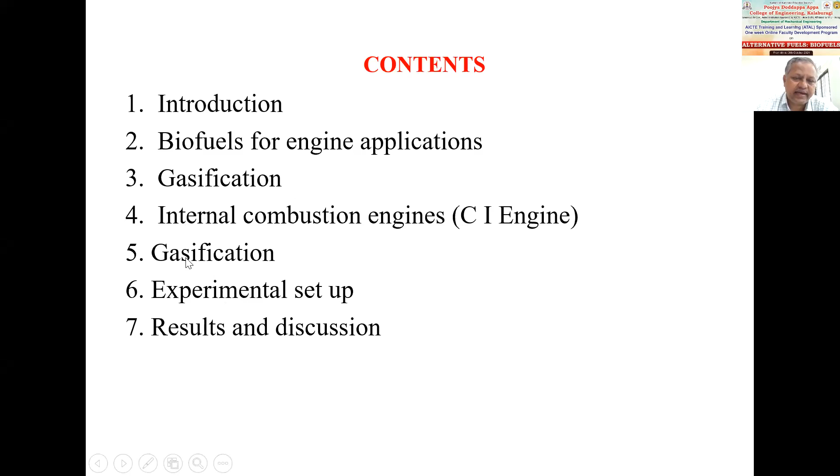In the third section, gasification means the production of gaseous fuel, that is an alternative gaseous fuel, that is producer gas. That will be discussed. In the sixth section, the experimental setup and results and discussion will be discussed, a different topic will be covered there, right?

First, an introduction to this topic. Everyone already knows why alternative fuels are used. The first reason is the depleting nature of fossil fuels, the second is the increasing cost of fossil fuels, and the third is increased pollution and stringent emission norms. These are the main reasons for using biofuels for engine applications.

The depleting nature of fossil fuels must be understood with some data, which I will explain in the coming slides. These are the main reasons.

All alternative fuels are renewable in nature and biodegradable, and they provide energy security and foreign exchange savings. These alternative fuels also address environmental and socio-economic issues. With the growth of the economy, India is expected to become the world's fourth largest consumer of energy by the year 2020, though this is still not yet achieved.

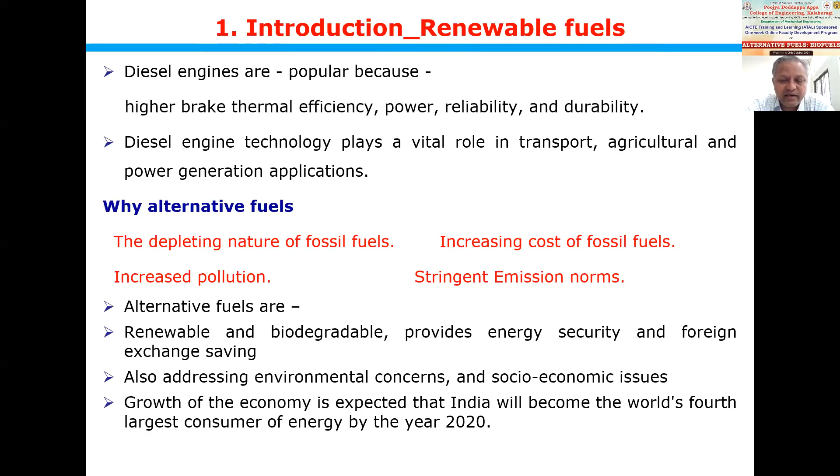The first reason I mentioned is that fossil fuels are not renewable, meaning all fossil fuels may deplete within some years. How do we prove this? Here is some data.

World proved reserves of crude oil at the end of 2012 were about 235.8 thousand million tons. In India, it was 0.8 thousand million tons. This data is as of the end of 2012.

In terms of barrels, world proved reserves were 1,668.9 thousand million barrels. In India, the crude oil reserve was 5.7 thousand million barrels. These are the proved reserves in the world and in India.

World proved reserves of natural gas at the end of 2012 were 187.3 thousand cubic meters. In India, it was 1,354.76 billion cubic meters. From this data, we can understand that fossil fuel is depleting.

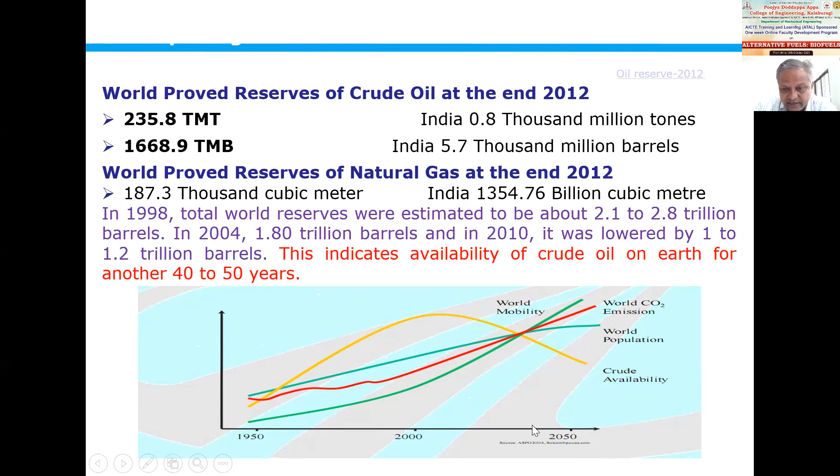From the graph shown here, along the x-axis toward 2050, the crude oil availability line, shown in yellow, is decreasing. At some point around 2040, crude oil will become empty in the earth's crust. From this graph we can understand this, along with the data proving the depleting nature of fossil fuels as one reason for depending on alternative fuel.

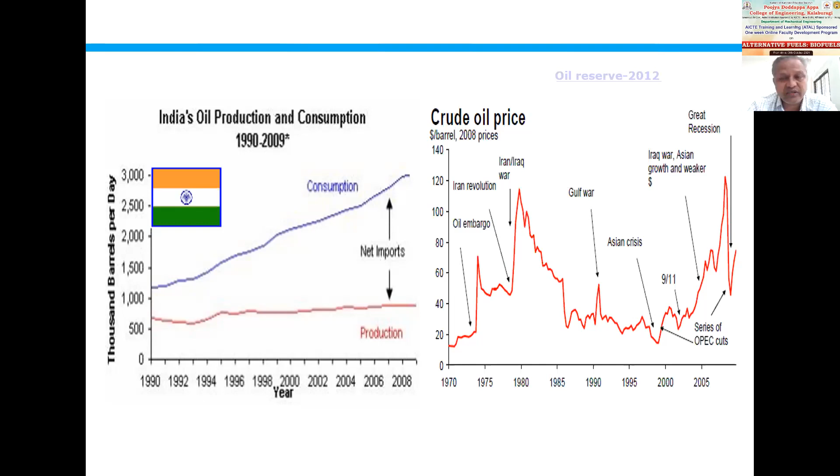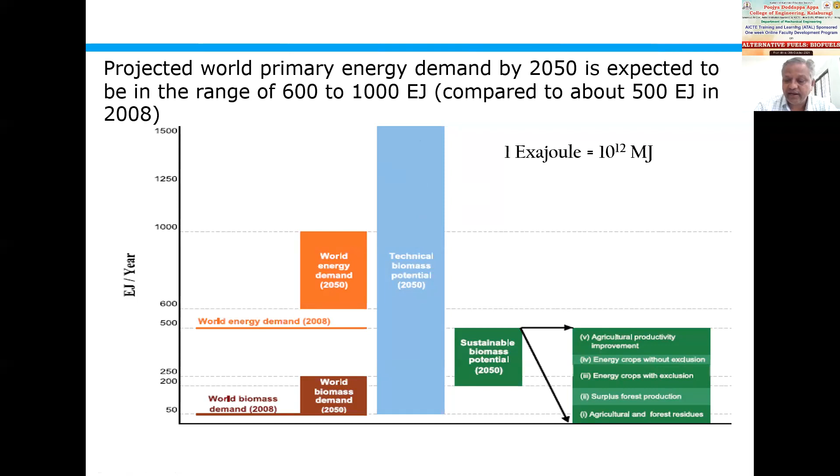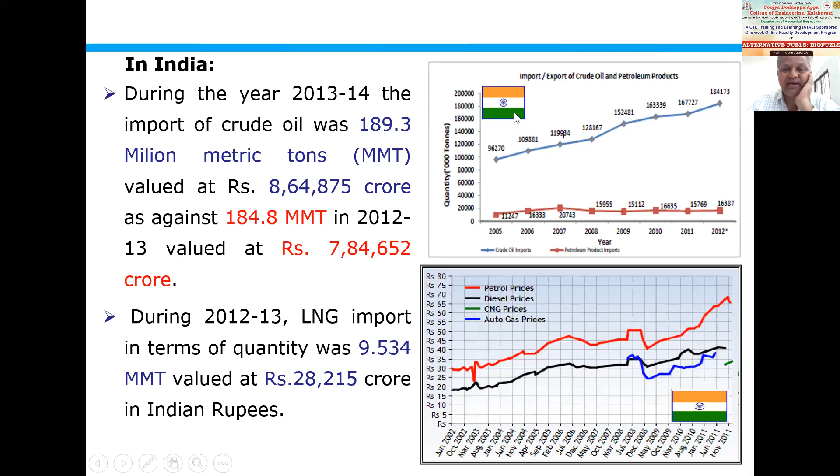Similarly, the LNG gas and natural gas imported is 9.534 million metric tons, valued at 28,215 crore in Indian rupees. This is the same trend explained in these graphs.

Next is the third reason for using alternative fuels. Why are we going to use alternative fuels? The third reason is emissions.

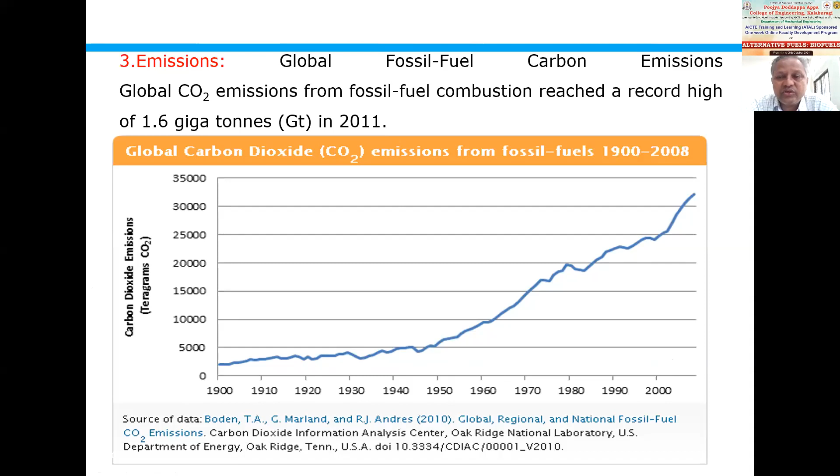If you start to use fossil fuels in an engine, they emit harmful emissions. From this graph, you can see global fossil fuel carbon emissions, global CO2 emissions from fossil fuel combustion reached a record high in 2011. In 2000, around 25,000 teragrams of CO2 was emitted. Every year the CO2 gas was increasing, meaning emissions are going to increase. So if you start to use alternative fuel, this emission can be reduced to some extent. That is the main reason.

In India during 2010, CO2 emission was around 310 million tons, which is 6.41% of world emission. India contributed 6.41% towards this CO2 emission. Biomass burning amounts to more than 1 billion tons of CO2 emitted into the atmosphere. Just considering India alone, every year the CO2 was increasing.

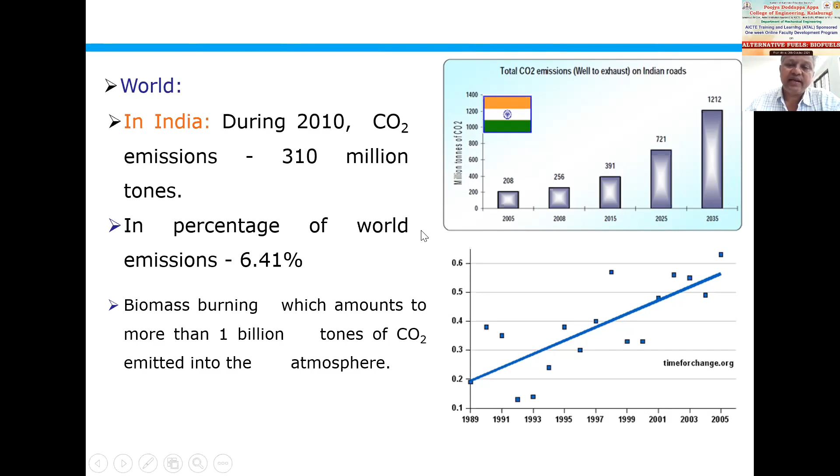From the graph, in 2015, 391 million tons of CO2 was emitted in India, and it may keep increasing. In 2035, how much CO2 may India produce? That is 1,212 million tons of CO2 India may produce in the year 2035. This shows that every year the emissions are increasing because of using fossil fuels.

This is also vehicular emission load in metropolitan cities of India. This record is taken from 2005. The pollutants considered are particulate, SO2, NOx, HC, and CO, along with the grand total for the year 2005. In India, the vehicular emission load: particulate about 35.31 tons per day was emitted, SO2 29.84 tons per day, NOx 422.88 tons per day, and HC unburnt hydrocarbon emitted during 2005.

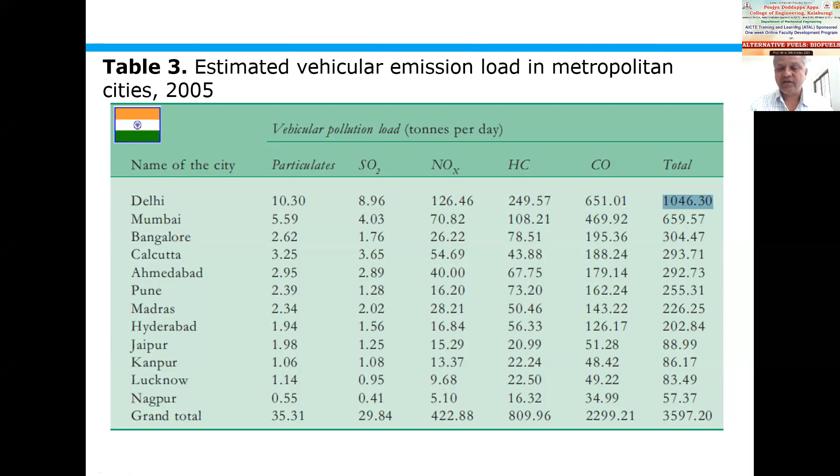809.96 tons per day, and CO carbon monoxide emitted is 2299.21 tons per day. Total emission during the year 2005 in India is around 3,597.2 tons per day. This much emission was produced by India.

This is why we are going to use alternative fuel. These are the main reasons: first, depleting nature of fossil fuels; next, price of fossil fuels is increasing; next, because of emissions. We must go for biofuels or alternative fuels.

The second topic is biofuels for diesel engine applications. This is about green energy and renewable energy. What are these? What is the difference between these two? Is green energy the same as renewable energy? Somewhat both are different. Renewable is not the same as green energy. Renewable energy source simply does not deplete.

Renewable energy means any source which is not depleting in nature, that is called renewable. Examples: solar, wind, hydroelectric—these are all renewable. Green energy is that which comes from natural sources such as the sun. Clean energy types do not release pollutants into the air, do not harm the ecosystem, and do not contribute to acid rain or worsening global warming. For example, sun energy can be used for producing electricity—this is green energy.

Renewable energy alternate fuels like ethanol and biodiesel, if used in a diesel engine, are renewable. Ethanol is renewable and biodiesel is also renewable. But when used in an engine, they produce emissions again. So this is renewable, but does not come under green energy. Green energy means it is clean energy that does not release pollutants—such energy is called green energy.

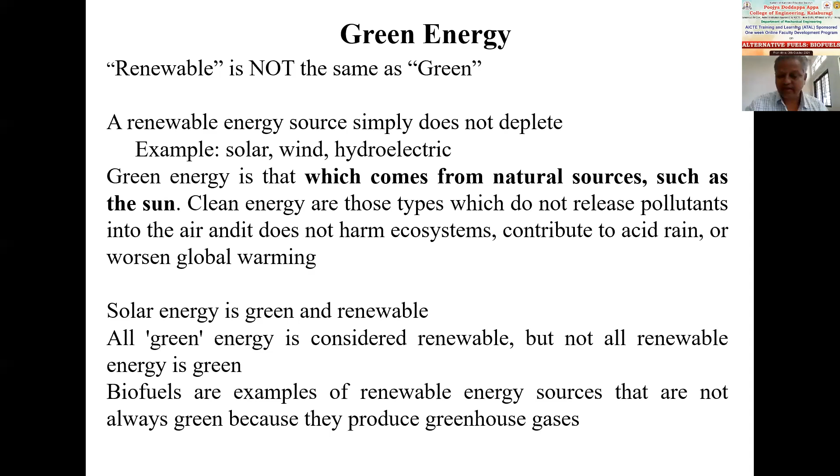Is there any difference between renewable energy and green energy? Are all renewable energies green energy? No, all renewable energies are not green energies. Renewable energy means they emit at least some small quantity of emissions, so they are not called green energy. Green energy means they are not emitting any type of emissions.

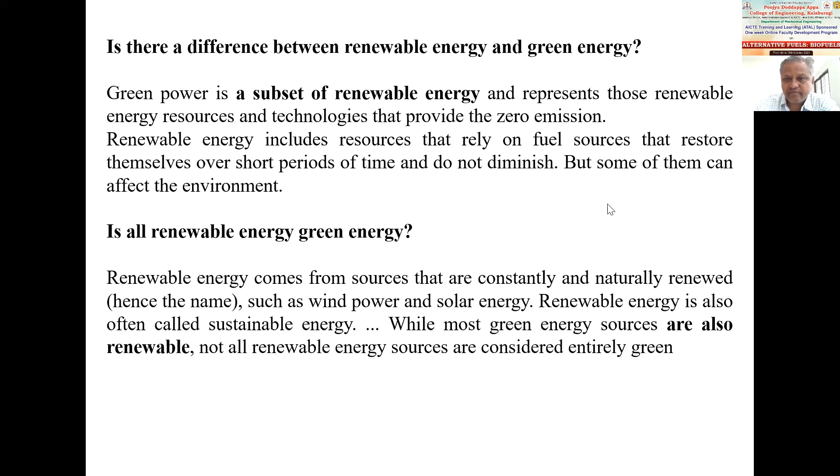Next, what are the main benefits of alternative fuels? The main benefits of alternative, renewable fuels or biofuels are that they are safe, available abundantly, and clean to use when compared to fossil fuels.

Use of biofuels or renewable fuels in engines reduces greenhouse gas emissions, improves public health, and can increase jobs or employability along with other economic benefits, as well as stable energy prices. They are renewable, reliable, flexible, and stable, biodegradable, and address energy and socio-economic issues, and save money.

There are many different benefits like that. There are many number of benefits. We will just go through that.

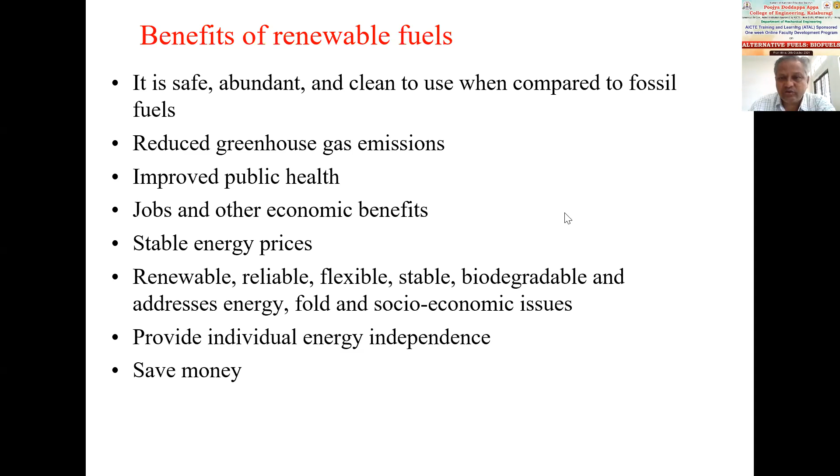Next is disadvantages. If all vehicles start to use these alternative fuels, is it possible to supply for all the vehicles from the government? No, it is not possible. That is the main disadvantage of renewable fuels.

Second, it is difficult to generate quantities of electricity as large as those produced by traditional fossil fuel generators, and commercially they are not viable. They also require storage capabilities, pollution is still generated with renewable energy, subsidies are not satisfactory, and projects require massive amounts of space, meaning land is required for growing these plants.

For example, Honge and Jatropha are non-edible seeds we get from these plants. If you want to grow such plants, large land is required, which will reduce food production, meaning it may increase food scarcity. That is the main reason for this disadvantage.

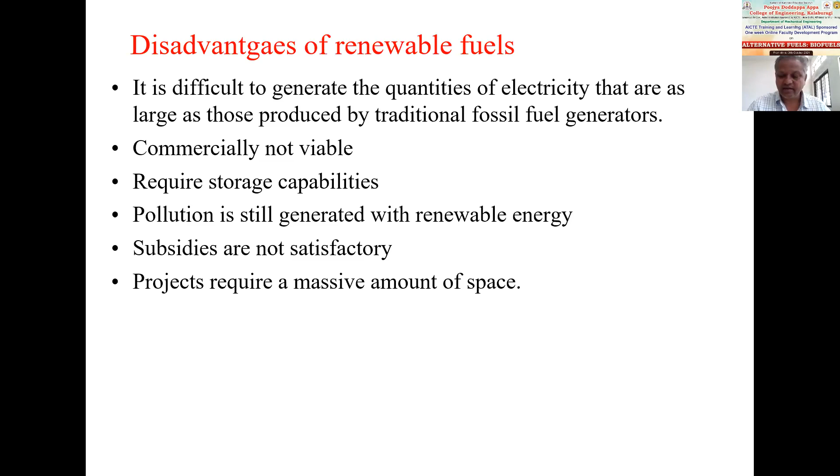Next is classification. How do we classify biofuels? The first classification is by generation: generation 1, generation 2, generation 3, and generation 4. There are 4 generations in this classification.

In the first generation, biofuels are derived from food crops. Such crops come under generation 1, like wheat, sugarcane, soybean, etc.

The second generation fuels are produced from non-food crops, meaning lignocellulosic biomass such as wood, agricultural residues, forestry waste, and organic waste. Fuels generated from these come under generation 2.

Generation 3 fuels are derived from algae and other microbes. Such fuels come under generation 3.

Generation 4 means an extension of generation 3 biofuels. In generation 4, algae is modified via genetic engineering to alter its properties and cellular metabolism. This is generation 4, just an extension of generation 3. This is the classification.

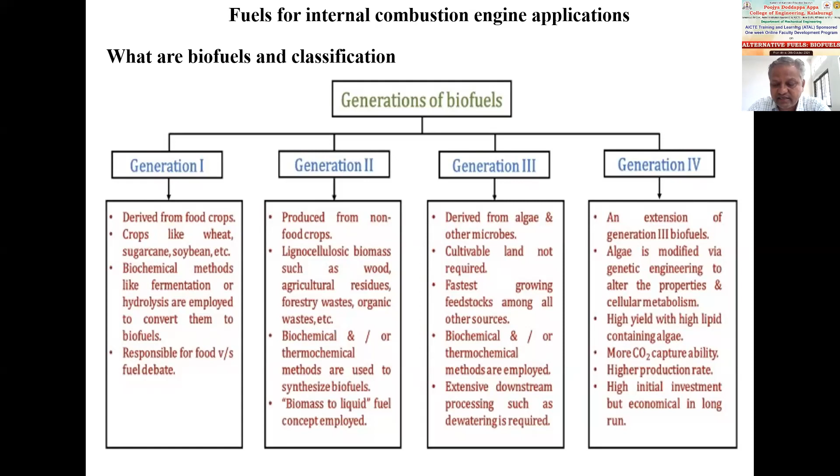As I already told you, in SI engines all types of alcohols and gaseous fuels can be used. In CI engines, biodiesels of different origin and gaseous fuels in dual fuel mode can also be used. Comparing energy content, the energy content of biodiesel is 90% that of its counterpart petroleum diesel.

The main disadvantage of alternative fuels versus fossil fuels is that alternative fuels have a very low energy content.

Based on calorific value, for example, a vegetable oil biodiesel used in a diesel engine has a calorific value of about 35 to 36,000, maximum up to 40,000 kilojoules per kg. Diesel fuel has 44,000 kilojoules per kg, so the calorific value is less. Therefore, the energy content of all vegetable oils and biodiesels is lower than that of diesel fuel.

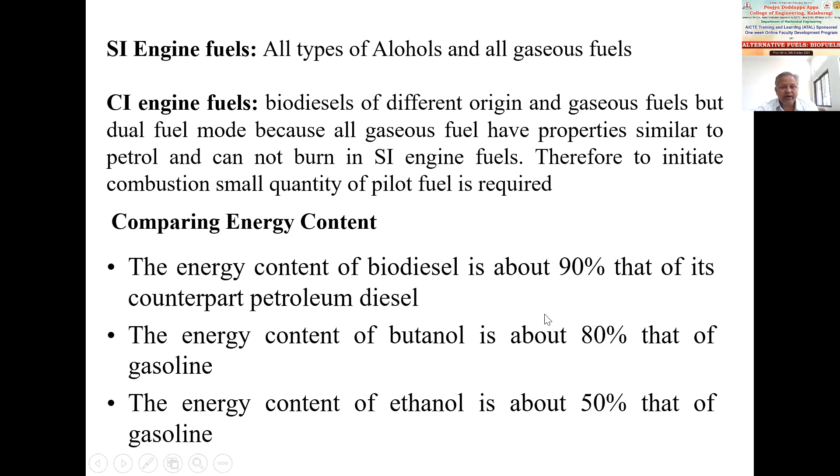Right, next one is in the next slide. These are the properties of different alternative fuels. Here, corn, palmitic acid, and different fatty acids are present in alternative fuels. In cottonseed oil, how much fatty acid is there? Here palm oil, peanut oil, rapeseed, safflower oil, soybean, like that. These are the different biodiesels, and they have different types of fatty acids.

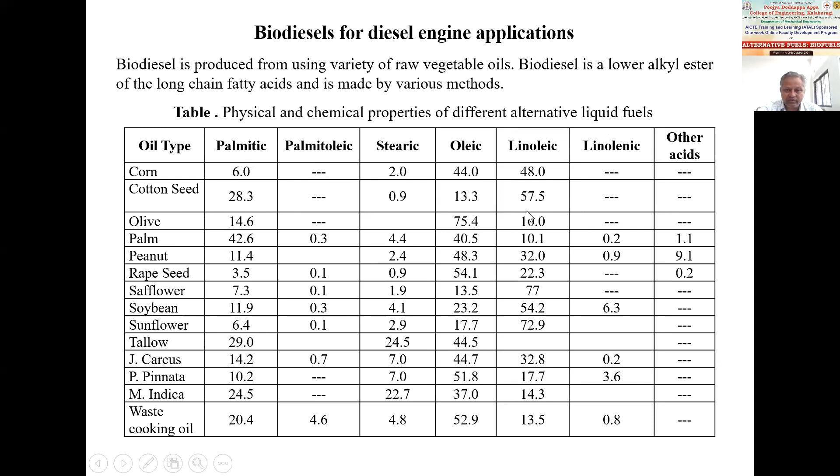In the next slide, these are the physical and chemical properties of different biodiesel fuels. Here cottonseed cetane number is 51.2, cloud point not available, pour point is -4 degrees centigrade, and flash point and viscosity values are given. These are the different biodiesel physicochemical properties.

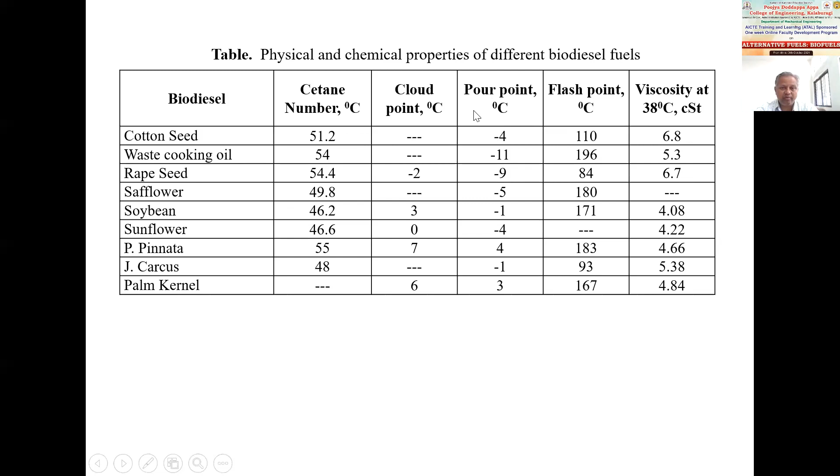Next, in the transesterification process, understand, how it works: first there is vegetable oil, crude oil, which goes through a pre-treatment process. Now next they go to pre-treatment, meaning neutralization and drying.

Neutralization means the acid value of the vegetable oil must be less than 1. Understand, it must be less than 1. Otherwise, if the acid value is more than 1, you have to go for a two-step process. Therefore, in this pre-treatment, you must reduce the acid value of the vegetable oil to less than 1.

Right, and next on one side, you have alcohol and catalyst, both of which are mixed. After mixing, the vegetable oil and this mixture go into the reactor, where they are heated and stirred continuously. Then it is transferred to a separating funnel. After purification or water washing, you get biodiesel.

For example, take 1 kg of any vegetable oil, any edible oil, say sunflower oil. For 1 kg sunflower oil, pre-treatment means you must check the acid value. If there is any issue, you have to filter the vegetable oil and reduce the acid value. It may be anything; there is a pre-treatment process you have to do.

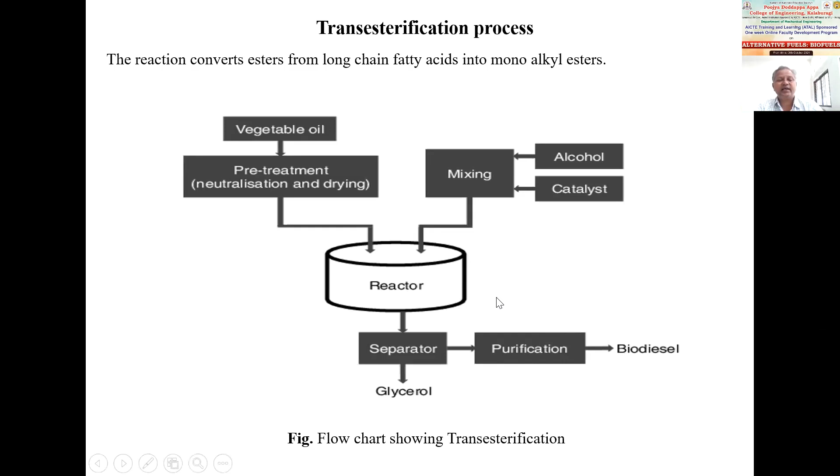Next, these are different transesterification setups. In the first figure, the biodiesel plant can produce 50 liters at a time. The second figure indicates a transesterification experimental lab setup, using hot plate apparatus, by which you can produce biodiesel.

This is the transesterification setup, and this is the biodiesel. Here we see washing and moisture removal. For moisture removal in the biodiesel bottle, you must put some silica gels. The silica gel will absorb the moisture from the biodiesel. This is the moisture removing process.

The last figure shows the separating funnel. After the process, after heating and stirring, after 1 hour it is transferred to the separating funnel. This shows how the biodiesel is separated from the glycerin, as shown in the figure.

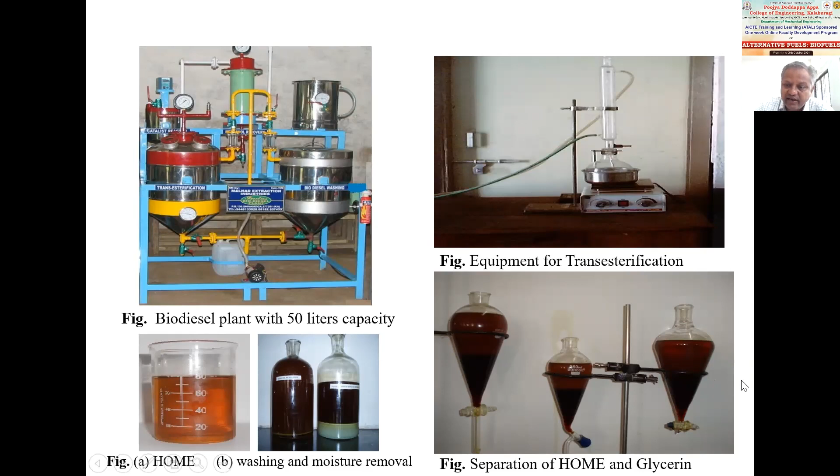Next is the chemical reaction taking place during the process. Then, effect of methanol on conversion: if you use more or less methanol or ethanol, what happens? The optimum molar ratio, also called reactant ratio, is 5:1. It was observed that percentage of conversion increased from 94% to 97% when the molar ratio was increased from 3:1 to 5:1.

If you use more or less methanol, what happens? A further increase in molar ratio resulted in lower conversion. If the molar ratio is higher, the conversion or yield decreases. It was observed that as the molar ratio increased, the density difference between the upper and lower layers tends to decrease, which makes separation of the layers more difficult. This is the main reason other proportions are not used.

Next, effect of temperature on the conversion process. It was observed that the viscosity of the tested oils decreases with increase in temperature, as you already know. The kinematic viscosity of Honge oil was found to be 17.94 times more than diesel, determined at 40 degrees centigrade. After esterification, the kinematic viscosity of the biodiesel was found to be 5.5 centistokes.

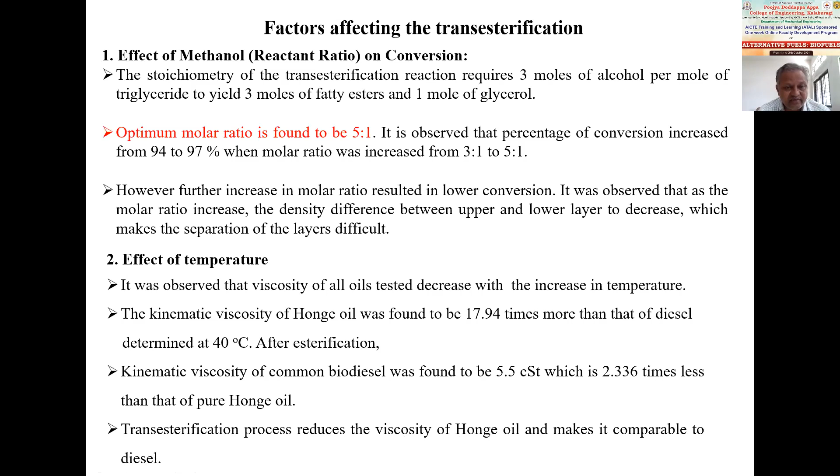You cannot use too high or too low a temperature. If you reduce the temperature, the speed of the chemical reaction will reduce. If you use very high temperature, the methanol will evaporate. Therefore, the correct temperature must be used.

Next, the effect of catalytic concentration. The catalyst used is NaOH or KOH. If you use higher or lower catalyst amounts, what happens? Approximately 1% NaOH, 1% catalyst, must be used.

If you use refined oil with free fatty acids less than 1%, the addition of excess amount of alkaline catalyst results in the formation of emulsion. That means if you use more than 1%, emulsion formation may take place, and it also increases viscosity and leads to formation of gels. Therefore, we cannot use more than 1%.

Increase in catalytic concentration beyond 1% does not increase the conversion, and it adds to extra cost also. This is because it becomes necessary to remove the catalyst from the reaction products at the end, which makes water washing very difficult. Therefore, the optimum is 1% catalyst, which will produce a higher yield, about 98% yield.

If you use more than 1%, it leads to formation of emulsion, increases viscosity, and leads to formation of gels.

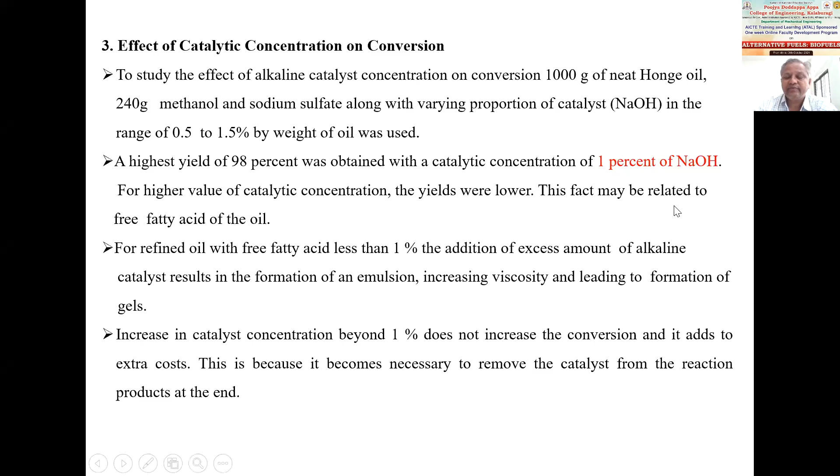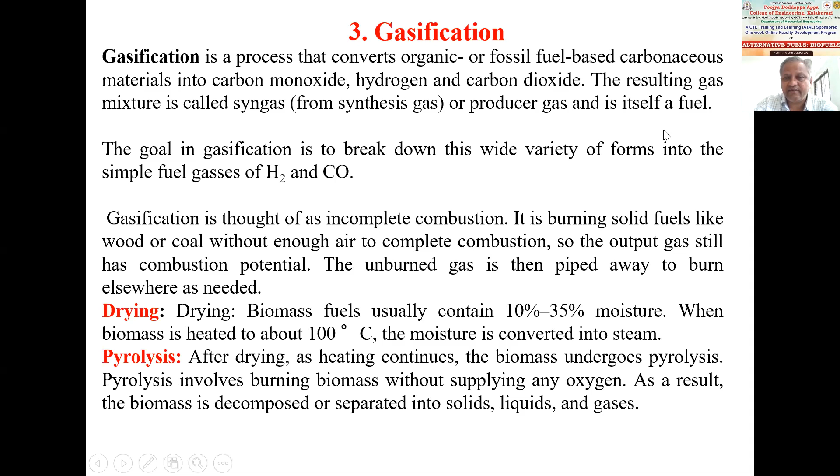The first zone is the drying zone, then pyrolysis zone, combustion zone, and reduction zone - consisting of 4 zones total.

In the drying zone, from the hopper, they pour the wood or different biomass, which is then transferred down. In the combustion zone, some part of this wood or coal is burning, and during combustion, heat is released and transferred upward. The biomass collected in the top layer, in the drying zone, receives this heat from the combustion zone, causing the wood to become dry.

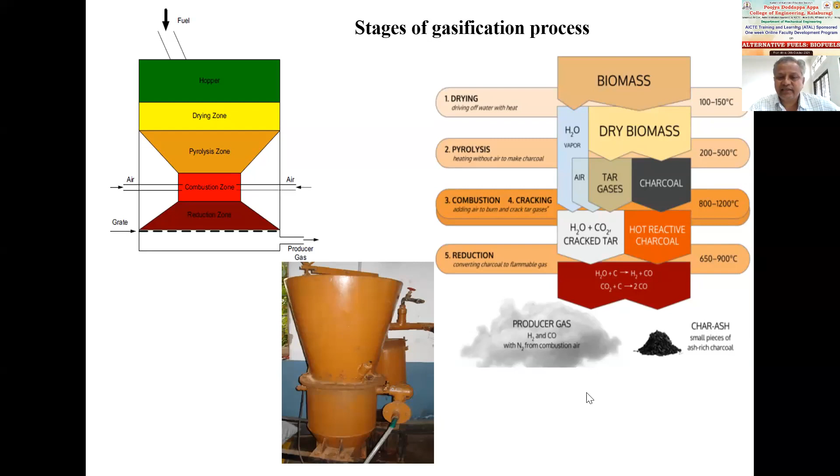Next, what are the advantages of this gasification? The advantages of biomass gasification technology are lower emissions, small and modular type, flexible operation, economically viable, socio-economically beneficial, and it helps mitigate climate change. These are some benefits of gasification technology.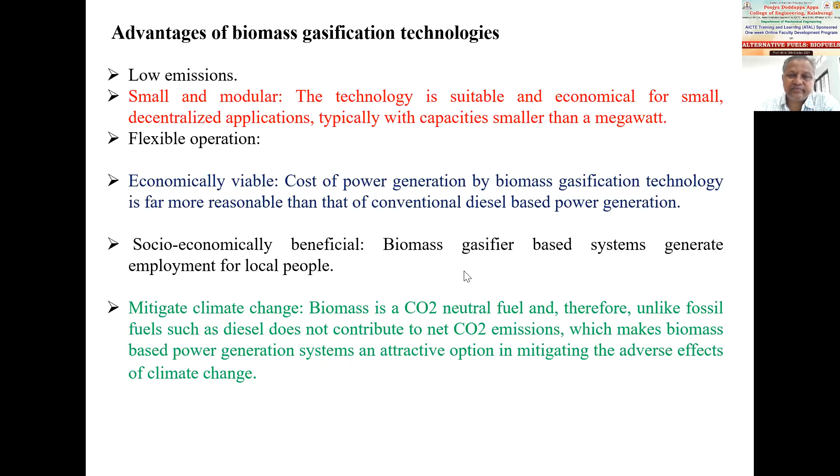Next, the gas quality is affected by what factors? From the downdraft gasifier, the producer gas is produced. This gas is affected by the energy content of the biomass - if it has high energy content, you get better quality gas. Next is moisture content - if more moisture is there, you will not get good quality gas. That is the main problem.

Next, volatile matter - the composition of the biomass, whether it has good volatile matter or not. And next, ash content and ash chemical composition. Some wood, if you burn it, gives more ash, some gives less ash. If the biomass contains less ash content, it is better.

Next, reactivity means whether the biomass reacts at a particular temperature - whether the release of volatile matters occurs or not at that temperature, that is the main thing. And next, size and size distribution, bulk density of the biomass, and charring properties - char properties. All these affect the gas quality.

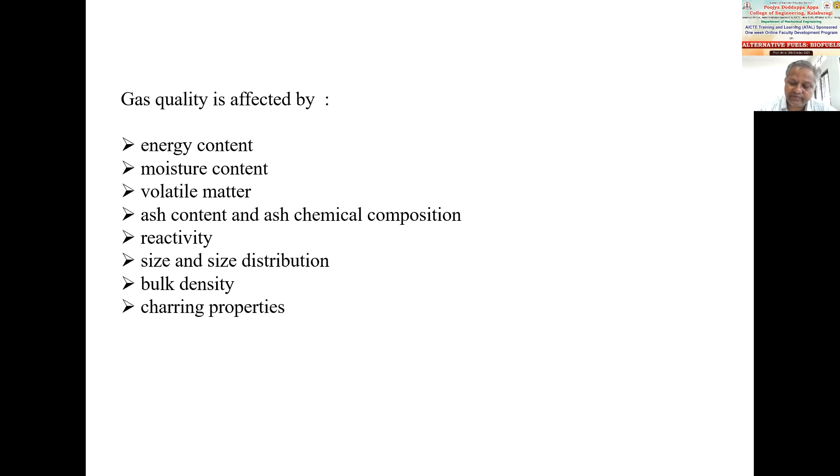Next, these are the proximate and ultimate analysis of biomass feedstocks. I have done proximate and ultimate analysis for 3 woods. Here you see Honge wood, the moisture content is 10.3%. And next, neem wood - the different volatile matter, fixed carbon, sulfur, nitrogen, gross calorific value of these woods, how much. Just see, the calorific value of wood biomass is very less.

Therefore, when you produce the gas, automatically the calorific value of the gas will be reduced to 2 to 3 times lesser than this. The producer gas may be reduced to 2 to 3 times lesser than the biomass calorific value.

And then the composition of producer gas - what you get from the gasification process, how much CO, hydrogen, methane, HC, nitrogen, water vapor, what percentage is there in that gas. For neem wood, the CO content in the producer gas is 27%, hydrogen is 14%, methane is 3%, HC and N2 not available, water vapor not available. CO2 was 8 to 14%, and its calorific value is 4.8 megajoules per normal meter cube.

And its density is 345. I think that is the biomass density.

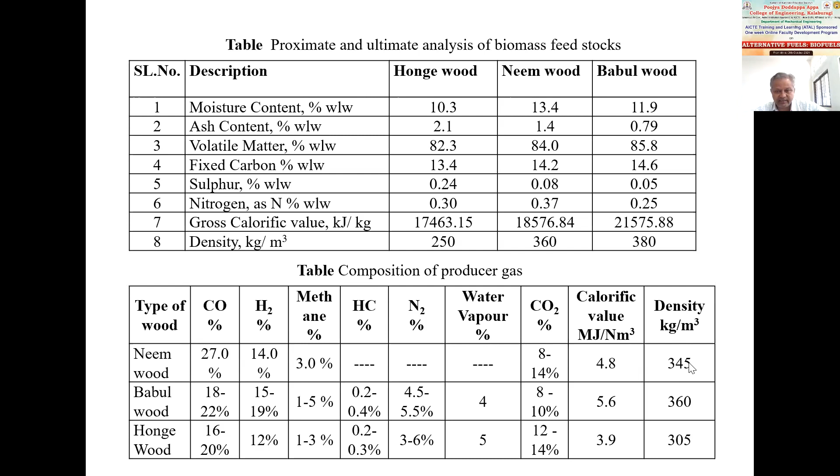Next, this slide is about internal combustion engines. We have seen what biofuels are, why they are important, which are the biofuels, CI engine fuels, SI engine fuels, and gasification producer gas and how it is produced. Now these fuels can be used in internal combustion engines.

We can use these fuels in internal combustion engines. An internal combustion engine is one in which the chemical energy of the fuel is released inside the engine and used directly for mechanical work.

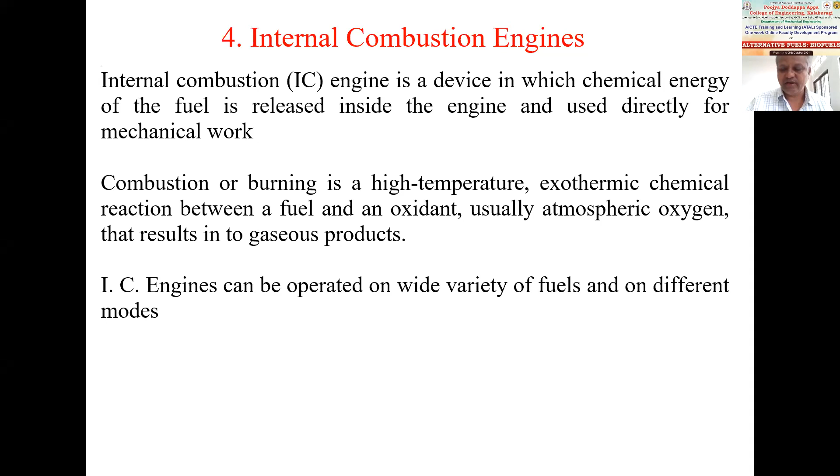Next, engines used for dual fuel operation. Dual fuel means using two fuels in a diesel engine. I will mainly concentrate on diesel engines; petrol engines will not be discussed here, because in the coming slides we will focus only on diesel engine fuels from now onwards.

Everyone prefers diesel engines for certain basic reasons: they have high thermal efficiency, are more powerful, have lower fuel consumption, are durable with good resale value, have lower HC and CO emissions, and lower running cost than SI engines. Diesel engines are more efficient because they convert approximately 45 to 50% of fuel energy to power.

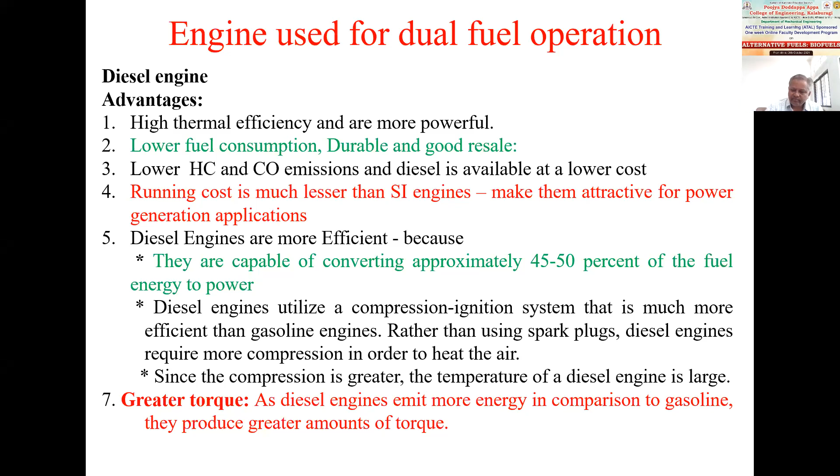These are some advantages why people prefer diesel engines. At the same time, diesel engines have some disadvantages: higher smoke and higher nitric oxide, while HC and CO, that is unburnt hydrocarbon and carbon monoxide, are less in diesel engines.

This is because diesel engines always use extra air, about 60 to 70% extra air. Therefore oxidation is better during combustion since more oxygen is available. Because of this, the oxidation process takes place more completely, and HC and CO both are reduced.

When HC and CO are reduced, nitric oxide emission automatically increases, because nitric oxide is formed due to better combustion. Better combustion means HC and CO are reduced, but nitric oxide emission increases because better combustion increases the temperature. The main point is that more oxygen leads to better oxidation in the diesel engine.

In a diesel engine compared to a petrol engine, 60% extra air is used. Because of this extra air, combustion takes place more completely, so HC and CO are reduced and all the fuel burns better.

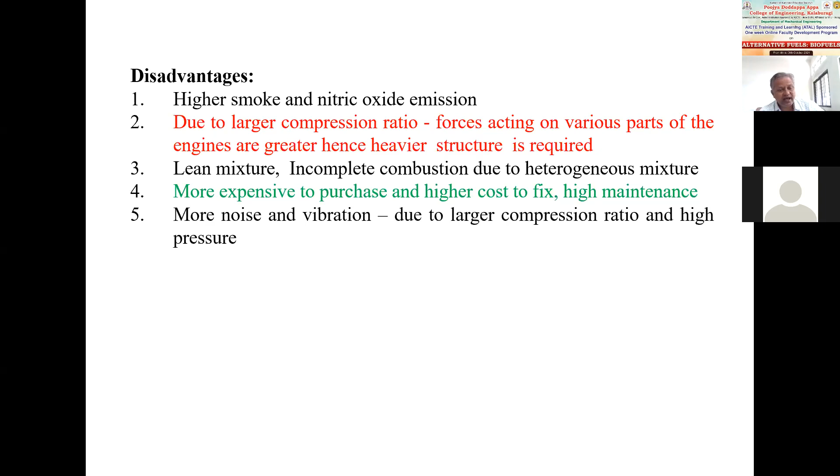Diesel engines are also more expensive, with higher cost to fix, high maintenance, and more noise and vibration. These are some general disadvantages, and now the future of CI engines.

The future of CI engines means achieving higher thermal efficiency with a high compression ratio. Higher thermal efficiency means all diesel engines will give higher thermal efficiency compared to petrol engines. Why?

High thermal efficiency means brake thermal efficiency equals BP divided by MF into CV. High thermal efficiency means brake thermal efficiency will increase, and you are using more than 60% extra air. Here the fuel consumption is very less. In diesel engine, the fuel consumption is very less. Understand the air fuel ratio. Compared to the petrol engine, air fuel ratio is very high in a diesel engine. Because of this reason, the fuel consumption is reduced, MF is reduced. Because when MF is reduced, automatically brake thermal efficiency of the engine will increase.

Even though high compression ratio is there, the compression ratio means temperature will increase. Because of high temperature, the combustion will become more better. This is the main feature of the CI engine.

Combustion with a lean mixture means, as I told you, in diesel engine they always use extra air, approximately 60% extra air. Therefore the mixture will become lean. When lean mixture is there, combustion will take place more better. Along with that, there is some fuel saving, which is better compared to petrol engine. And diesel is a less expensive fuel, the cost of the fuel is very less.

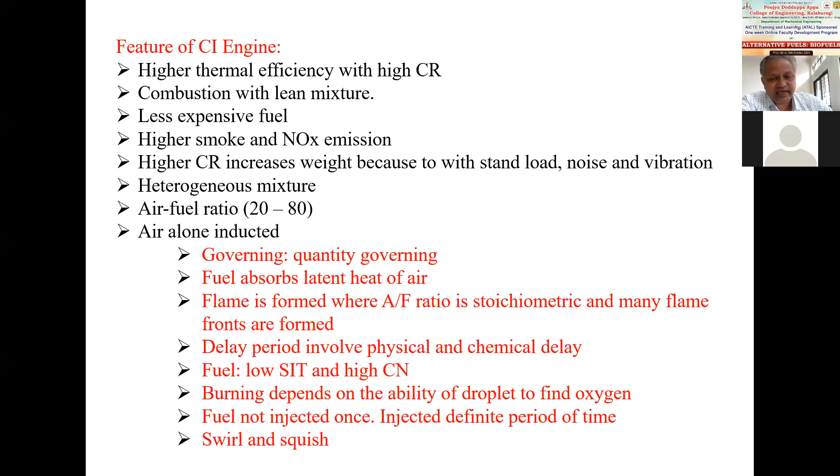Next, in compression ignition engines, there are DI and IDI engines, direct injection and indirect injection engines. Direct injection means the engine has a single open combustion chamber into which fuel is injected directly into the cylinder. Only one combustion chamber is there in which the fuel is injected, and there only the combustion takes place. Such engines are called direct injection engines.

In indirect injection engines, the combustion chamber is divided into two regions. Fuel is injected into the pre-chamber, which is connected to the main chamber via a nozzle or one or more orifices. So fuel is injected somewhere, partial combustion occurs, and it comes to the main combustion chamber. This is an indirect injection engine.

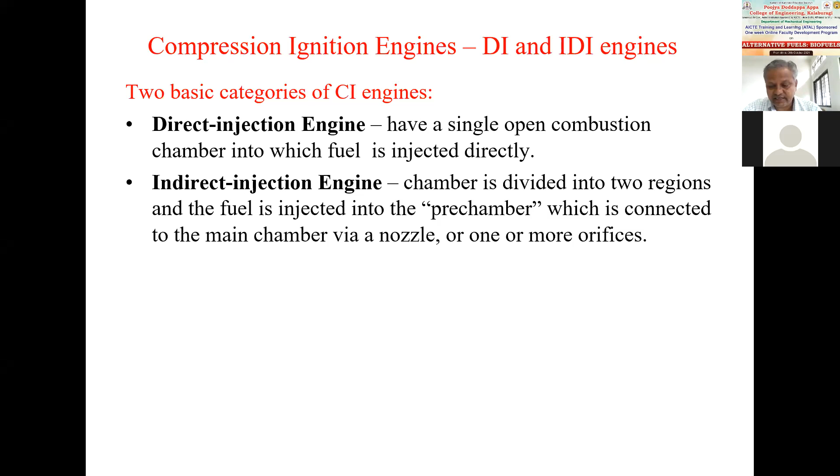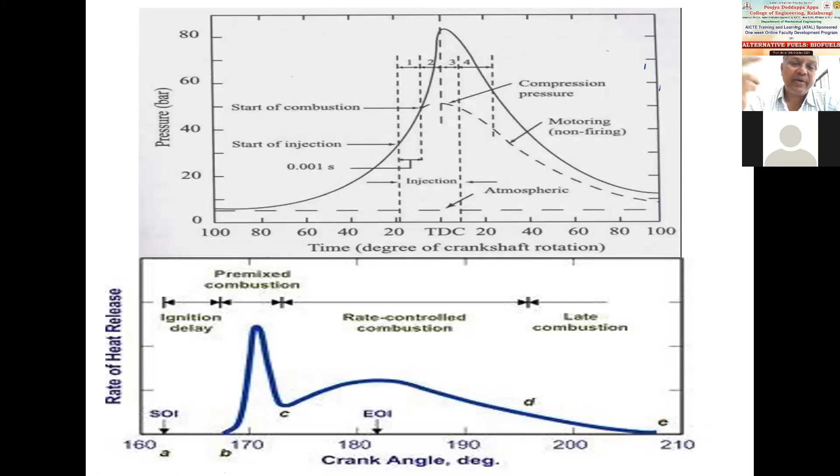This delay period is very important. Just see here, injection start, when the injection takes place, and where it ends - there's a long gap shown here. This is the delay period, meaning the injection period. If this delay period becomes longer, then inside the engine cylinder, more fuel will be collected. When more fuel becomes ready for combustion, rapid combustion takes place. Therefore, pressure and temperature increase, and this leads to knocking.

The delay period will be increased when you do the injection timing advancing. When you advance the timing, the delay period is increased, so more fuel will be collected inside the cylinder. When more fuel burns suddenly, it leads to knocking - a high pressure rise takes place that causes knocking.

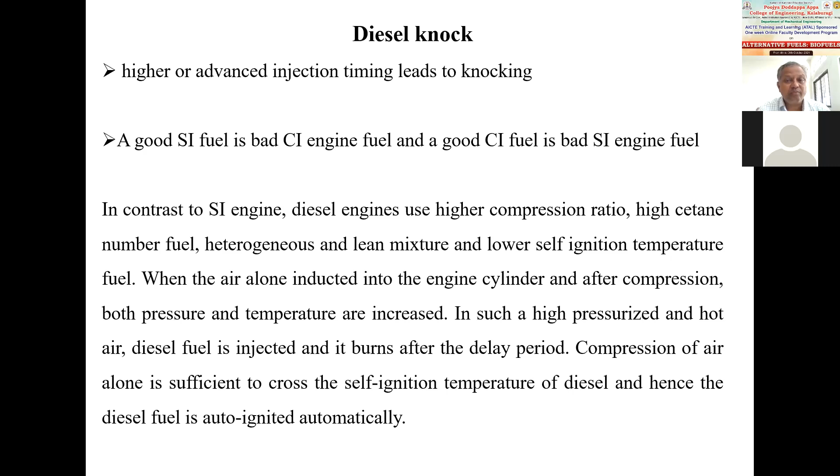We have seen that a good SI engine fuel is always a bad CI engine fuel, and a good CI engine fuel is always a bad SI engine fuel, because it all depends on fuel properties. Next, knock can be lowered by using these points.

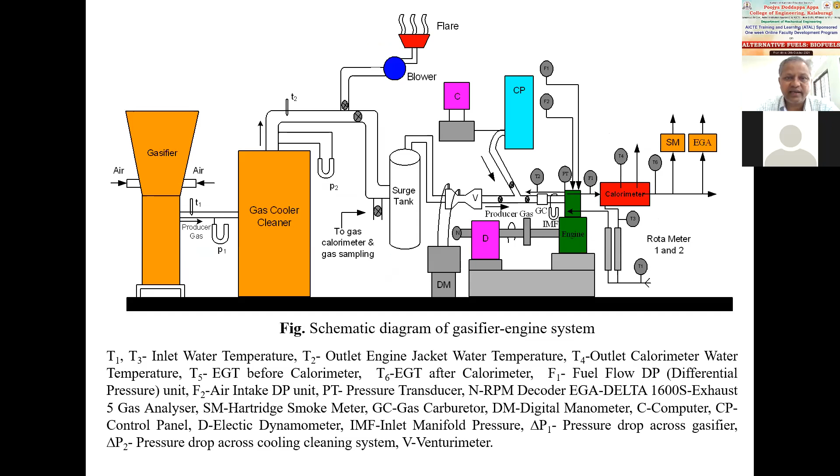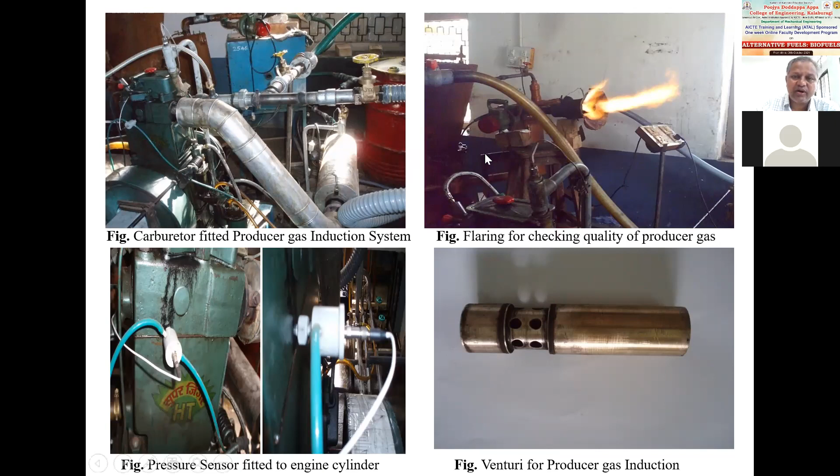Next, results and discussions. First, in results and discussion, we will see the optimization of injector opening pressure.

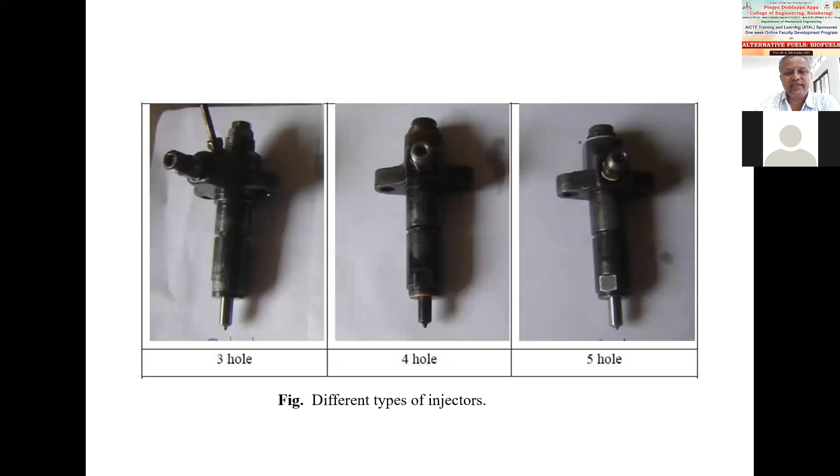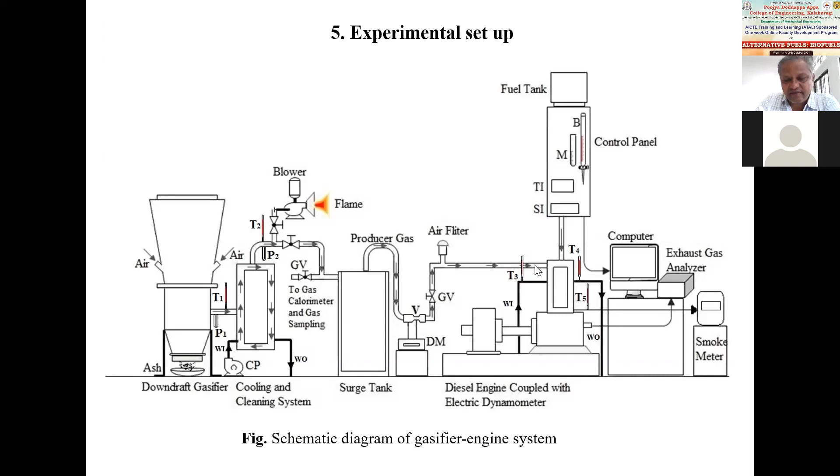What we have discussed till now is all about the basics. Next, this is the engine experimental setup I have shown here. This is a dual fuel engine, and this is the downdraft gasifier. The gas is filtered and cooled, and after cooling, the gas is sent to the engine where the air is mixed. After mixing air and producer gas, they are sent to the engine cylinder during the suction stroke.

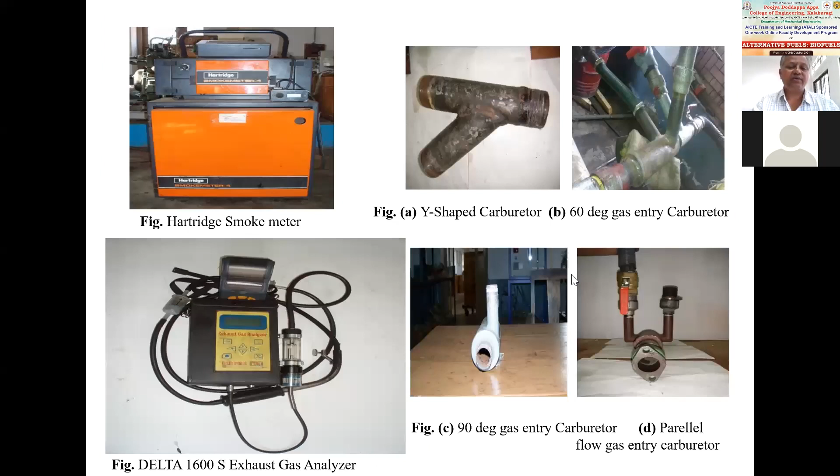In our work we have used different types of nozzles - 3-hole, 4-hole, and 5-hole nozzles - and each hole has a different size. Suppose you take a 3-hole injector: the hole size could be 0.25 mm, 0.3 mm, or 0.5 mm. In the 3-hole injector, different hole sizes are used. Now suppose you take a 4-hole nozzle - what is each hole size?

Again, different sizes we have taken, and we have seen different types. The first one is that we have optimized injection pressure. At what injection pressure is the efficiency higher?

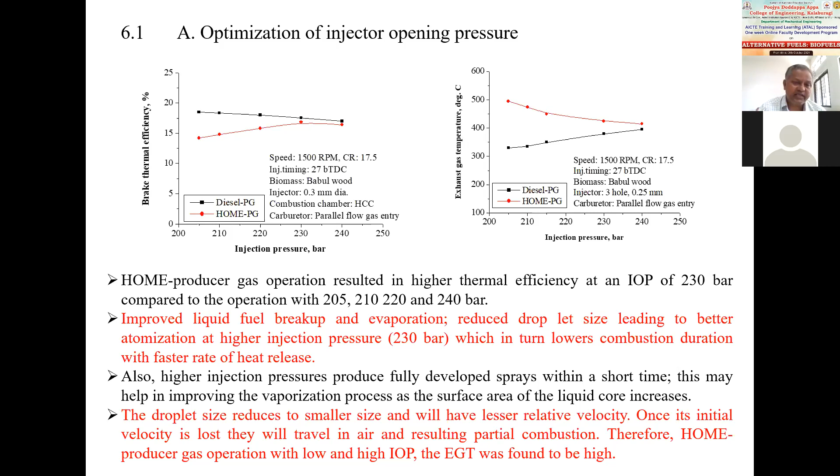The fuel starts to float only on the air, so mixing becomes incomplete. Because of this reason, the brake thermal efficiency is reduced. The same reason can be applied to exhaust gas temperature and smoke opacity.

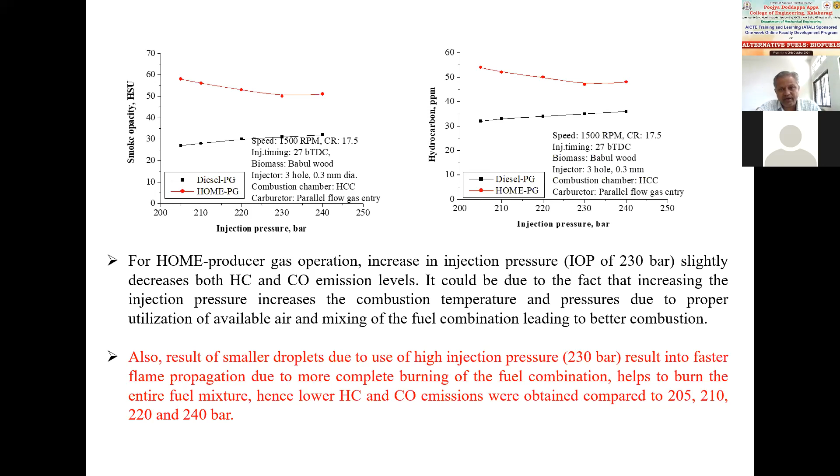because when HC and CO are reduced, it indicates better combustion. When HC, CO, and smoke are reduced, it indicates better combustion. When there is better combustion, the combustion temperature increases. When temperature increases, NOx emission automatically increases. At 230 bar, NOx emission will be increased.

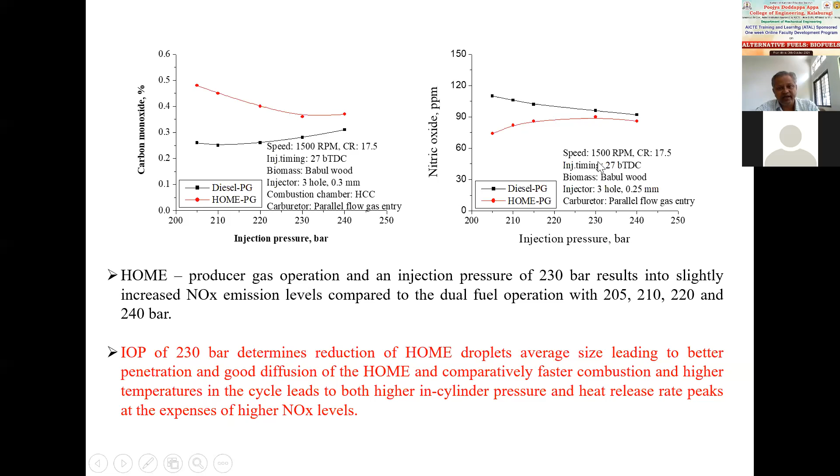This is the reason. Next is optimization of number of holes, that is 3 hole, 4 hole, or 5 hole injectors. For biodiesel, we got better brake thermal efficiency performance with 4 holes compared to 3 hole and 5 hole. For diesel PG operation, 3 hole gives maximum efficiency. So for biodiesel PG operation, the 4 hole injector resulted in higher brake thermal efficiency.

This is why only at 4 holes it results in higher brake thermal efficiency, because with 4 holes, more fuel will be admitted into the engine cylinder. Therefore combustion becomes more complete, and since the calorific value is less, to get more power, more fuel needs to be burnt. That is the main reason.

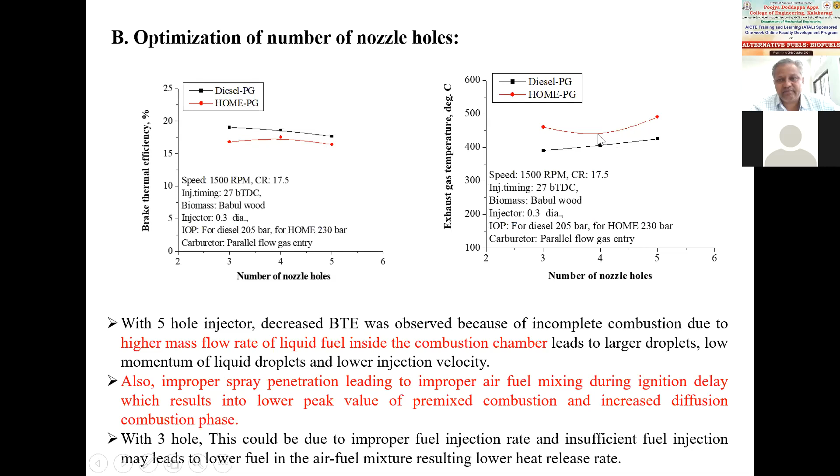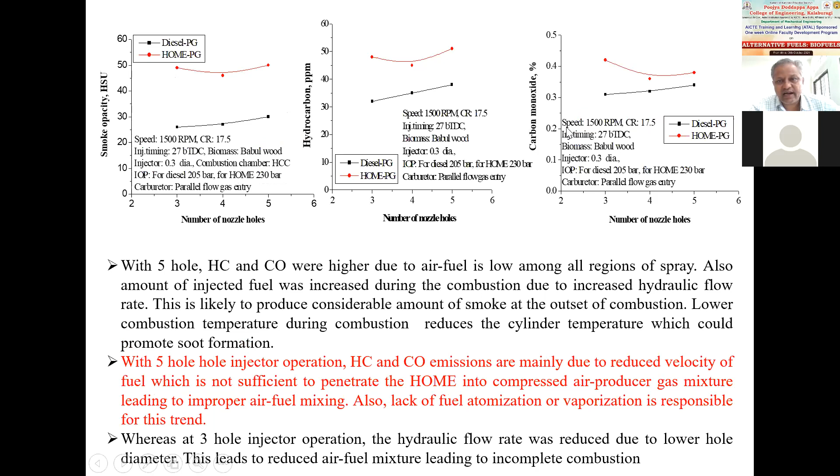For this reason, 4 hole resulted in higher brake thermal efficiency, and exhaust gas temperature is lower. Smoke opacity at 4 hole is less. Just you see the biodiesel PG red color line, it is less at 4 hole. Hydrocarbon and carbon monoxide are less at 4 hole only, but nitric oxide is higher. Automatically, when the other emissions are less, nitric oxide becomes high. This is the optimization of nozzle hole number.

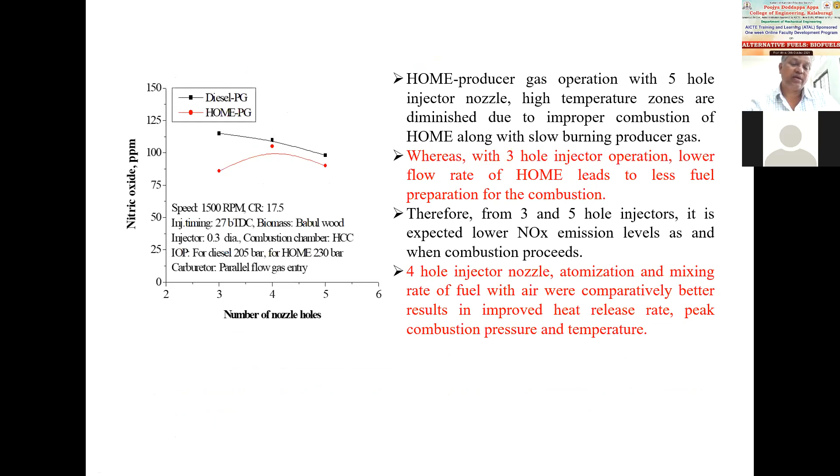Next is optimization of nozzle hole size. Which hole size is optimum? In the last case, 4 hole was found optimum, so here we keep that constant. We select a 4 hole nozzle only, and injection pressure is optimized at 230 bar. For biodiesel PG operation, 230 bar is the highest injection pressure, and 4 hole resulted in the highest brake thermal efficiency. Therefore, we keep these two constant and now vary the nozzle hole size.

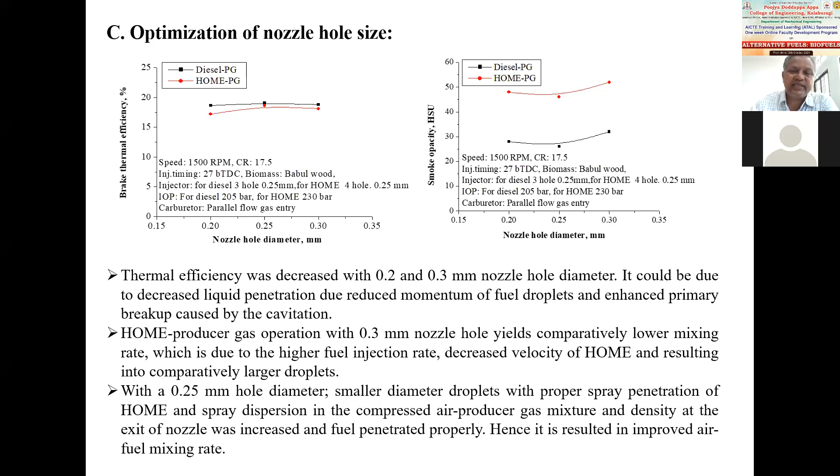Nozzle hole size of 0.25 mm resulted in higher brake thermal efficiency, at which smoke, HC and CO are less. But nitric oxide is higher. Next is optimization of the combustion chamber.

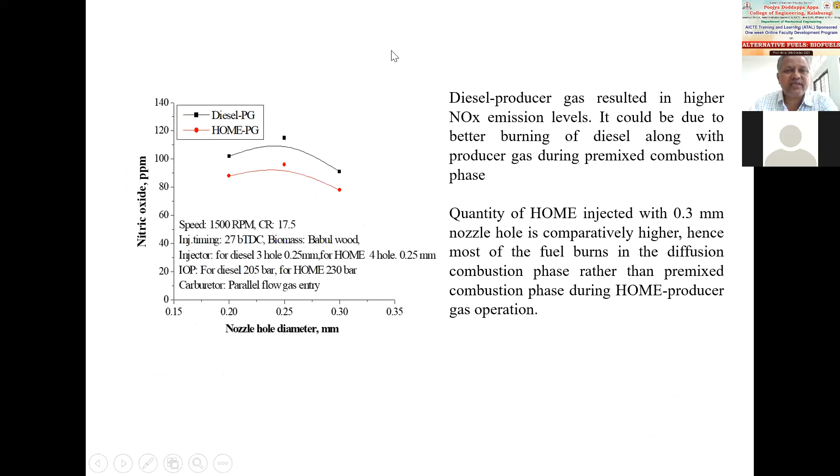Combustion chamber means we have used two types of combustion chambers: one is hemispherical combustion chamber, and the next is re-entrant type combustion chamber. And two fuels, the engine is operated using all fuels, that is diesel PG HCC, biodiesel PG HCC, biodiesel PG RCC, and diesel PG RCC.

Why does RCC give higher brake thermal efficiency and lower emissions? The main reason is that when you use a re-entrant combustion chamber, the swirl is improved because the combustion chamber shape is changed. Because of that, the swirl and squish produced inside are improved. Therefore, when the swirl is changed, automatically the mixing will be improved.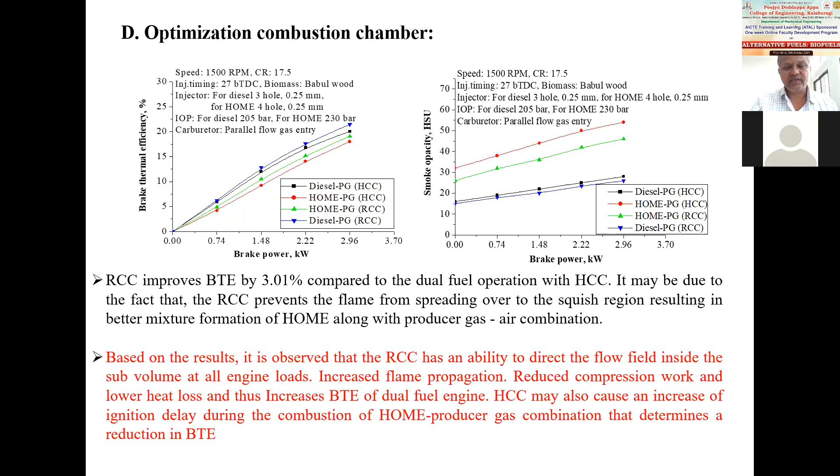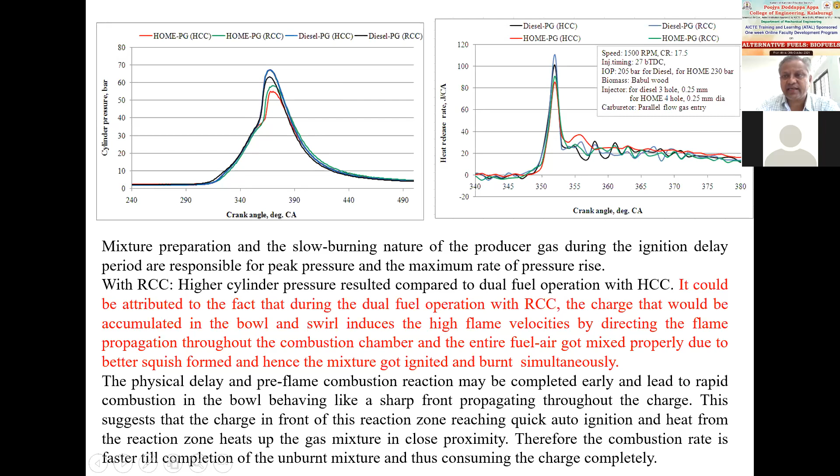When a homogeneous mixture is formed, automatically the efficiency increases with RCC, re-entrant combustion chamber. Here, smoke, HC and CO emissions are less, nitric oxide is increased, and cylinder pressure is increased with RCC. Cylinder pressure and heat release rate both get very high. A similar experiment we conducted is the effect of hydrogen on the combustion characteristics of a PG fueled diesel engine.

Here also we have varied hydrogen at 4 LPM, 8 LPM, and 12 LPM at different brake power. When you mix hydrogen with the producer gas, automatically the efficiency is increased. Just see the red color line here, it is the biodiesel producer gas combination. When you mix hydrogen with PG, the brake thermal efficiency is increased.

At 8 LPM hydrogen usage, the efficiency is higher, shown by the blue color line. Also, the engine was operated at more than 80% because power derating is reduced when you use hydrogen. Brake thermal efficiency is increased when an optimum quantity of hydrogen is used, because hydrogen has a higher flame velocity, and using hydrogen also increases the oxygen reaching ability.

The oxygen reaching will be increased because hydrogen has a higher coefficient of diffusion. Higher coefficient of diffusion means it increases the oxygen availability. Therefore, the mixture will be formed correctly.

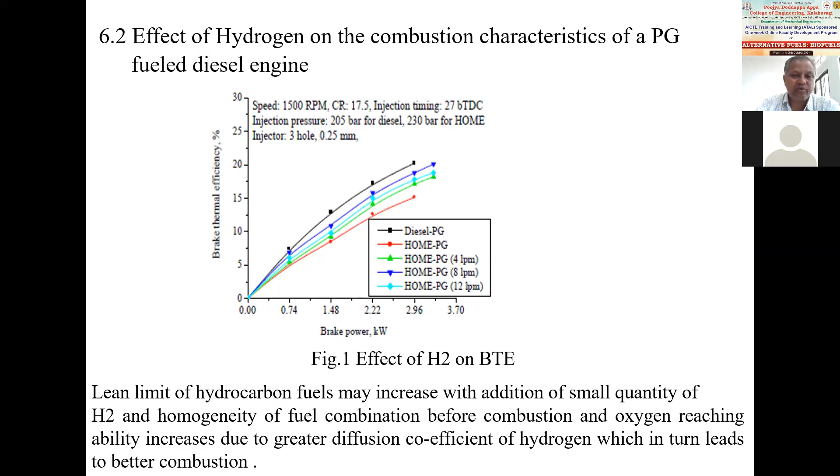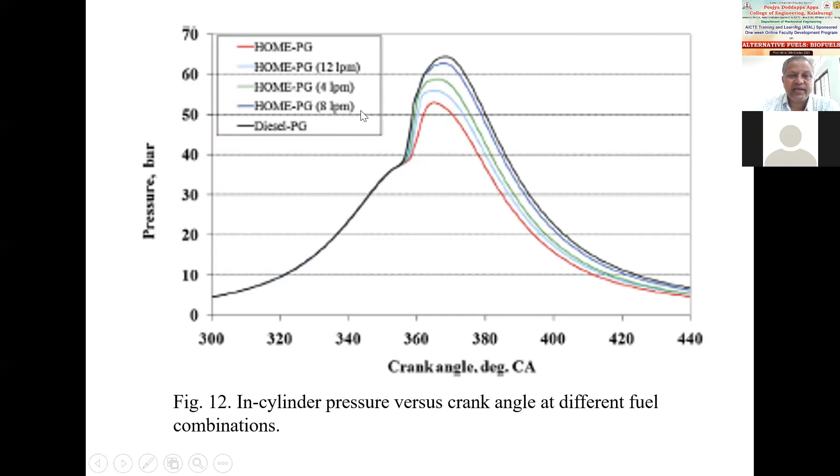Because of this reason, at 8 LPM all emissions are decreased, and pressure is increased. At 8 LPM you get the highest peak pressure, and at 8 LPM only you get the highest heat release rate.

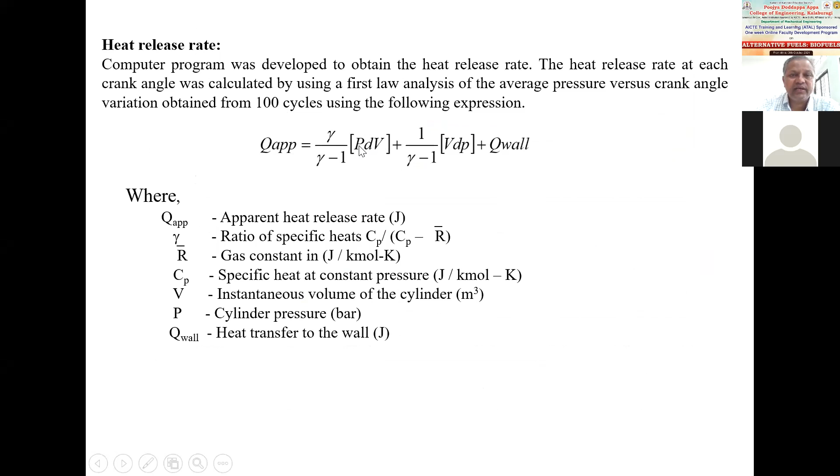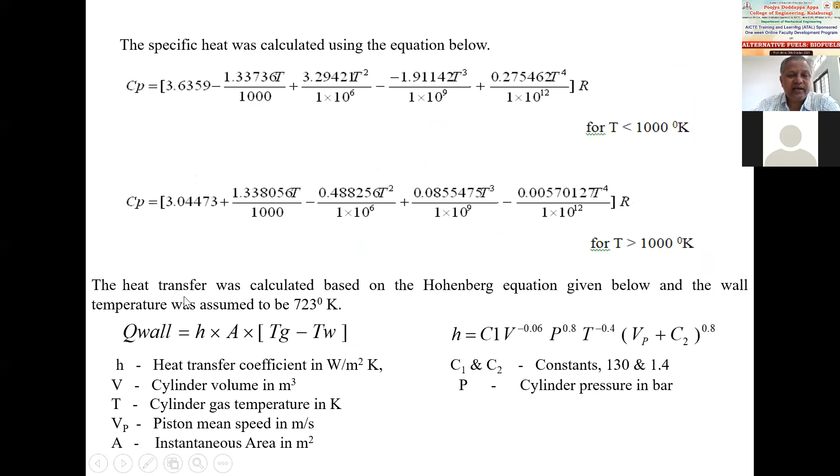Heat release rate is calculated using this equation shown here, along with how specific heats are calculated. Heat transfer was calculated based on the Hohenberg equation given below here.

alternative fuels always lowers the efficiency of the engine.

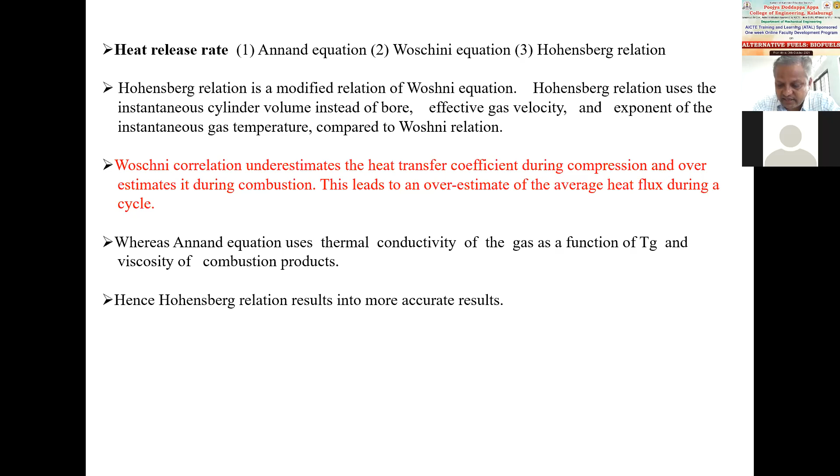Therefore, some optimization must be done, such as optimization of parameters like injectors. We have seen injector optimization, hydrogen addition, or other advancements. You can use CRDI engines. By using such things, we can improve the efficiency of the diesel engine and also reduce emissions. This is the main conclusion of this study. Thank you very much.